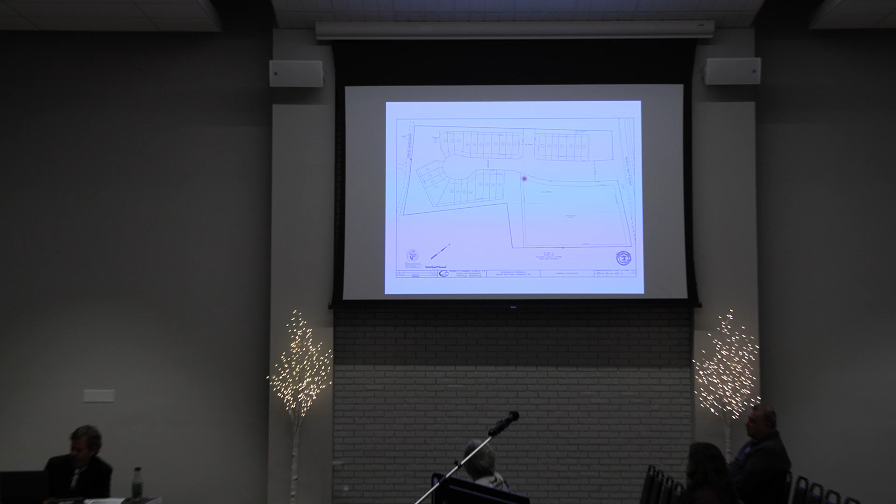There's also a public road going to the north that would tie into that property. There'll be an access, not a public road, but a private access easement that would go to the south. And then here's the 30 townhome lots with open space kind of around that.

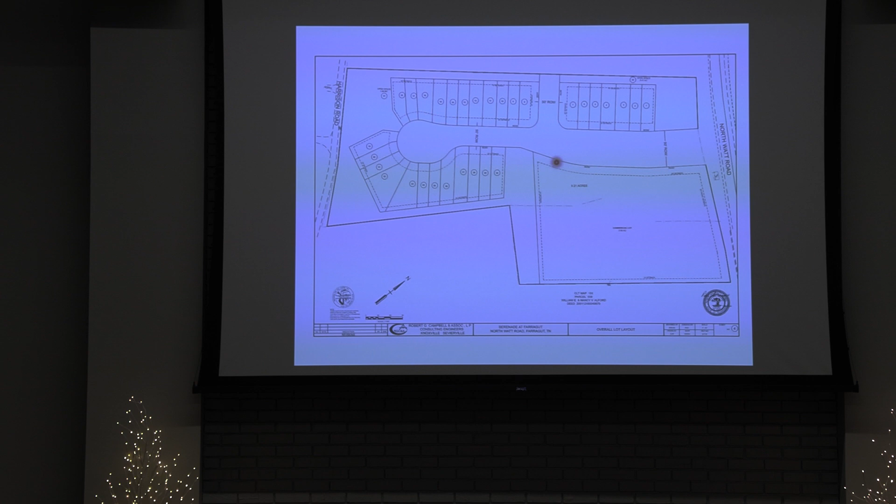This area is going to be where the commercial part of the mixed-use neighborhood would be against North Watt Road. This shows that a little bit more in detail. They have the dog park kind of in the northwest corner of the property. And this is kind of the commercial,

the rest of it. Tree preservation plan, which was in the packet. Most of the really large trees are kind of along the periphery. There's some really large oak trees along Harrison Road.

That's one of the staff subjects on the preliminary plat, is just to really field locate that tree protection fencing and maybe have an arborist involved, if there's a way, to try to minimize disruption to those trees along Harrison Road so that they can be saved.

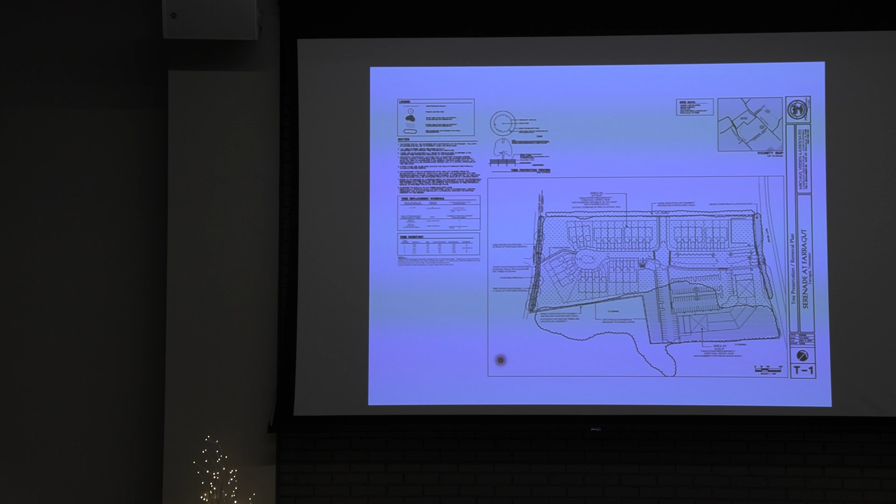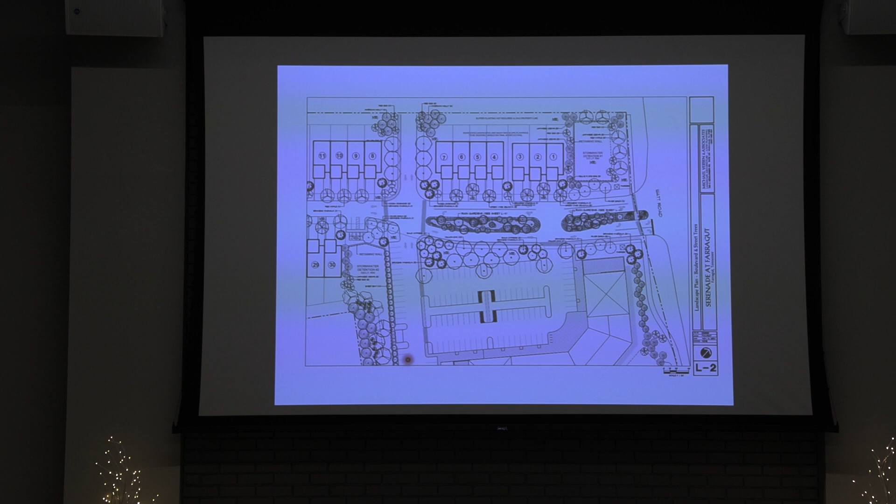What they're proposing as far as the streetscaping, and to address some of the low-impact development requirements of the town, is similar to what they did at the Cottages at Pryse Farm, where they've got a lot of rain gardens in the median. And that's going to be another area where we'll need to have an agreement between the town and the developer as to how that's maintained.

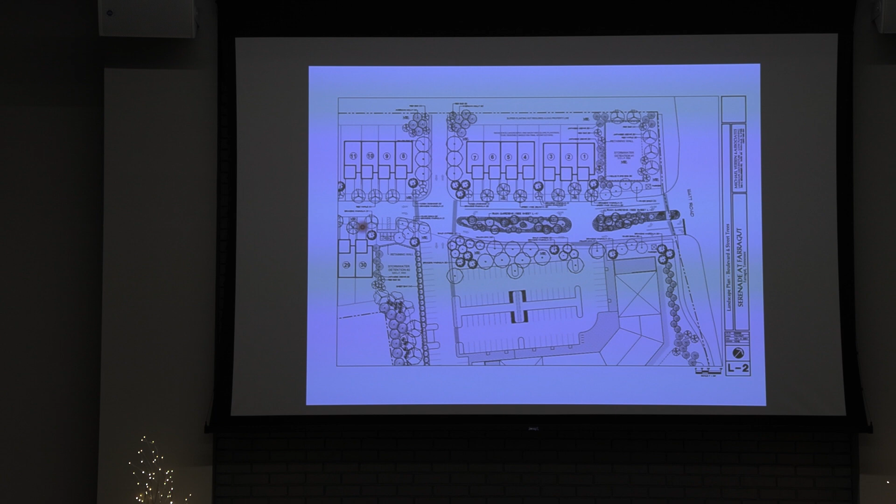That's going to be maintained by the development, but that would need to be clear. Same thing we did with the Cottages at Pryse Farm. The homeowners association maintains all those areas in the median, the rain gardens and the sidewalk.

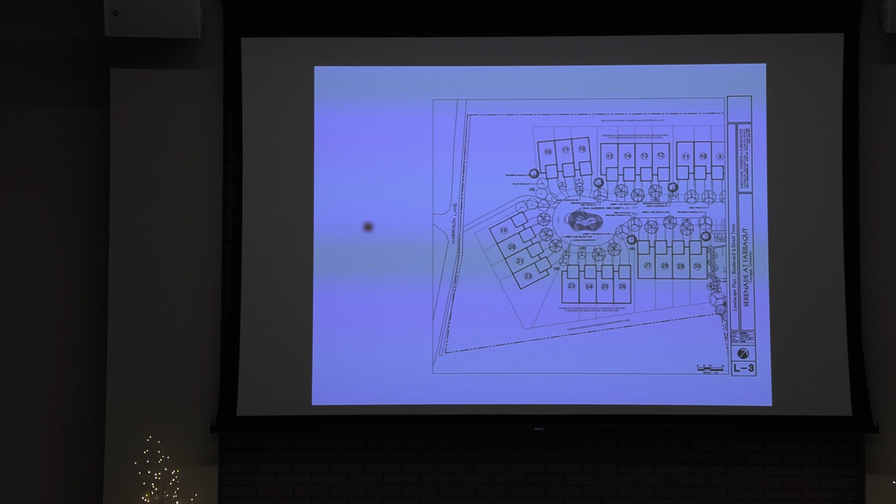So that's kind of an overview of the project. So getting back to the access would be the first action to be taken here, if anybody has any questions on that. The design engineer is here, and he can talk to you all about the access and why they selected that particular location, if you have any questions.

All right, Mark, I want to ask for a motion and a second on the variance for the driveway distance requirement. Move to approve. Second. The variance, for the reasons stated by the staff.

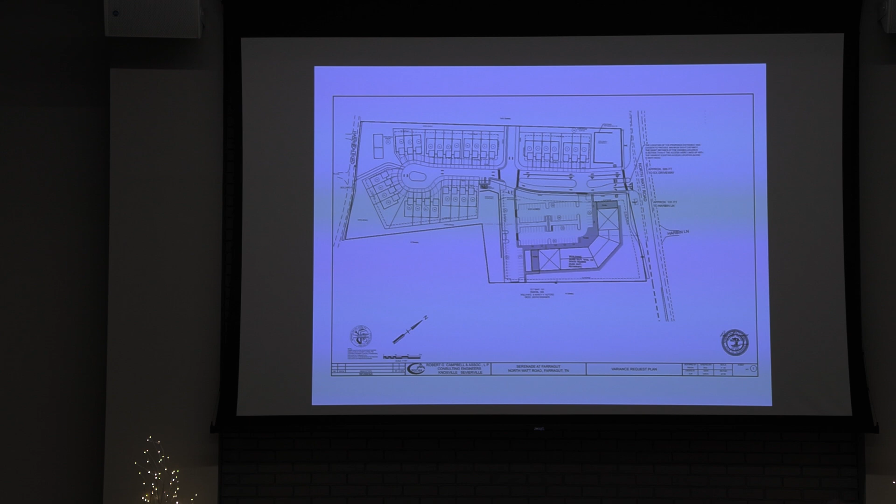Okay, and before we move on to the preliminary plat discussion, Mark, do we have any persons signed up to comment on this item? No, sir. Okay, do we have a representative from the applicant present to answer any questions? Yes, sir.

Mark, I have a question for you. If not for that Harbin Lane, would this variance be needed? Yes, they actually are within 400 feet of the access to the north, too. It's on the west side of Watt Road. So, yeah, they would have.

Also, just for clerical purposes, this property is not accurately shown on the KGIS map. It's still shown as C1. Even now? Yeah. Really? Okay. And I think the parcel north of it is shown as NCC, and I don't think that's supposed to be... Yeah, that is NCC to the north. Oh, it is? Okay. This one obviously should be, and we'll get that addressed. The one to the north was rezoned before this one, several years ago. I couldn't recall that. That's been a while, I guess. Yeah. Okay, those are the only, that's all I had.

Do you have any comments on any discussions that you had with the staff? I believe Mark just stated kind of what we have. We've got slightly better sight distance, and the way Watt Road kind of goes down over the hill, our driveway sits up a little bit, so at the 3.5 feet it gives us a little bit better line of sight down the hill. But also, in the situation we're the first one here, so we think that ought to have some merit to it.

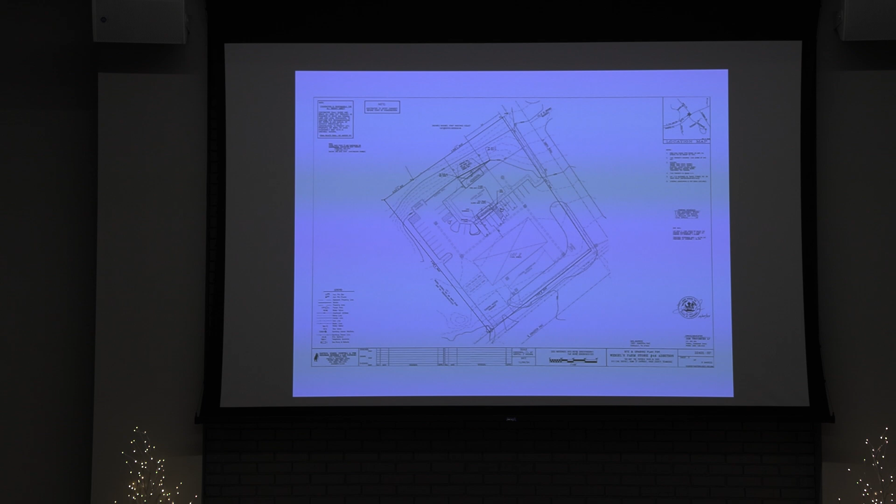As far as the materials, they're going back with brick to match to the greatest extent possible the brick on the existing building. You never get a perfect match because it's been there for a few years, but their plan is to have brick on both additions.

So the staff recommends approval of this site plan, subject to obtaining building permits for the work. And if they do any alterations to the signage, I don't think they're altering the lighting, but if they alter any signage, that would have to be approved through the Visual Resources Review Board. So with those two conditions, the staff recommends approval of the site plan.

Move to approve with the subject twos. Second.

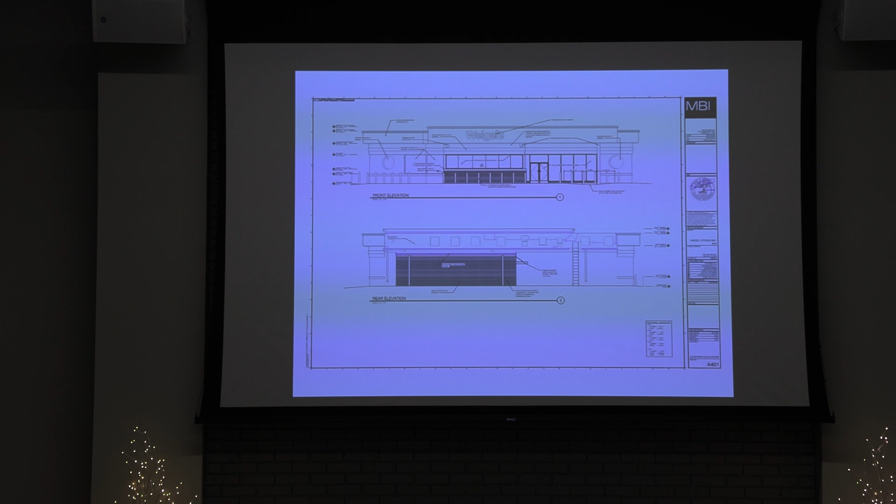Thank you. Mark, do we have anybody signed up to speak on this agenda item? No, sir. All right, we have a representative from the applicant.

Howdy, Melissa Clark, 3100 Weigel Lane, Powell, Tennessee. I'm the real estate director for Weigel's.

I've been working with Mark on this project for a little bit. We were not ready last month with the revisions, so rather than waste your time and mine, I pulled it until we had all the revisions in for Mark to review.

This is our standard remodel that we've been doing. This is what we call our Generation 2 stores. They've been around for a while, usually about 20 years or so. So we're going in and adding food service to these stores. We add the addition to the back to give freezer and cooler room to hold food so it can be prepared. We take the addition to the front and move the cash register that is currently in the center of the store to that front bump out. And then we take what is now the cash register area and turn that into a small deli.

So that'll be identical to the North Shore design? Yes. Or our Westland Avenue design? Yes. Yeah, the first time I went in there, I didn't know where I was.

I was like, something's different, I couldn't really put my finger on it. So I asked the clerk, when did you do this? She said, we just finished it like a month ago. This is, what, maybe a year ago? Yeah. And she said, you would not believe how many people come in here and are confused. I said, well, put a sign up on the door saying, yes, we remodeled. Yes, we do try to keep our stores open during remodeling, so sometimes there's a little bit of confusion as we're getting it open and going.